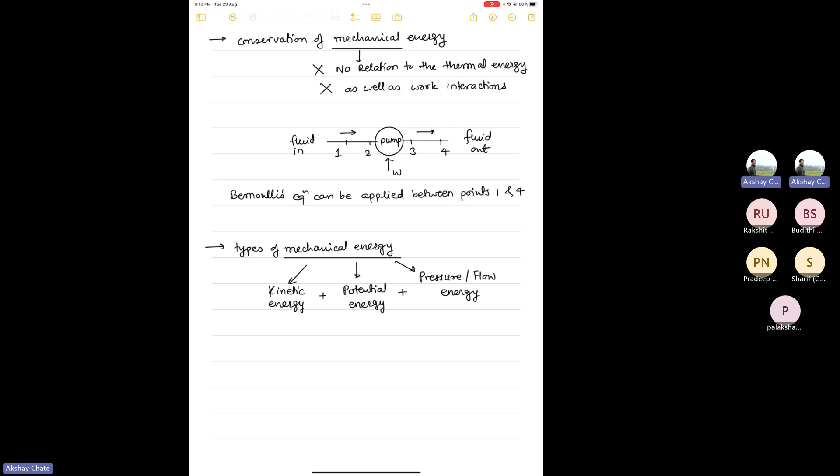Now, if you are interested in the derivation of this equation, basically they take a fluid element along a streamline and do some physics. I can't do it here because first of all I have not prepared it, and it is not part of this course also. But if anybody is interested in why this equation is of this form, there are some lectures by Professor Suman Chakraborty on NPTEL. I think it is one of the courses on fluid mechanics. There you can find it, I think.

Or you can refer to any standard book. Maybe FM White will have it, or IG Currie will have it. So if you are interested, that is completely optional. If you don't, that is also fine. There is no compulsion here. But if anybody is enthusiastic enough or interested enough, maybe you can go there. But we'll come back to the final form that we are interested in.

So basically, I'll write the form that we typically use, but first we'll highlight the assumptions. This is very important because if you attend any technical interview after GATE exam or ESE exam, and if you say fluid mechanics is one of my favorite courses, then rest assured they will ask you questions from the boundary layer or pipe flow or Bernoulli equation. Typically, they don't go into turbulence and other things because they themselves have forgotten by that time.

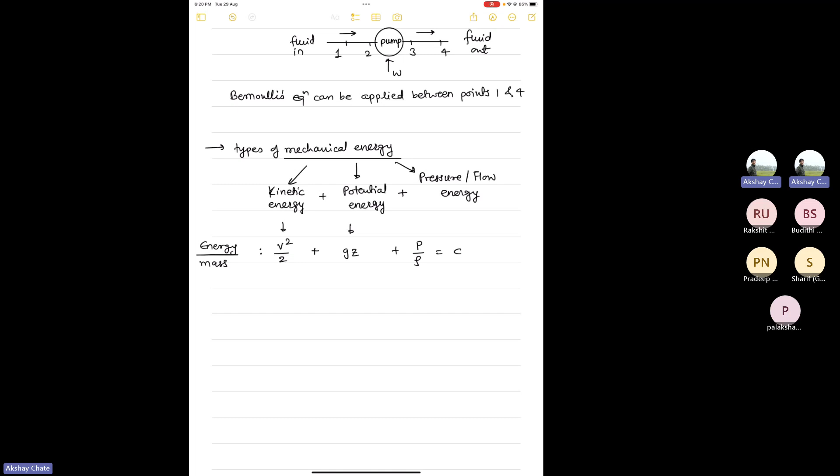And then the pressure energy, if you just match the units, you'll realize that if you want to write it in the form of energy per unit mass, then it takes typically this form. And C is a constant because, as I said, it is a conservation equation. So the sum of these three quantities for a fluid flow between any 2 points should remain constant under some assumptions that we'll discuss.

Somebody can express this equation in the form of head, which is typically done. So that is basically head or energy per unit weight. So basically they divide the whole equation by g, gravity acceleration. So then it becomes v square by 2g plus z plus p by rho g is equal to c.

So then they call this a static pressure head. This is your datum head, and this is your dynamic pressure head. So you can write it in any form, but in the end it's a conservation of energy equation that you should remember. And one important term, static pressure head plus datum head, they are typically called piezometric head. These are all terminologies, you should remember them.

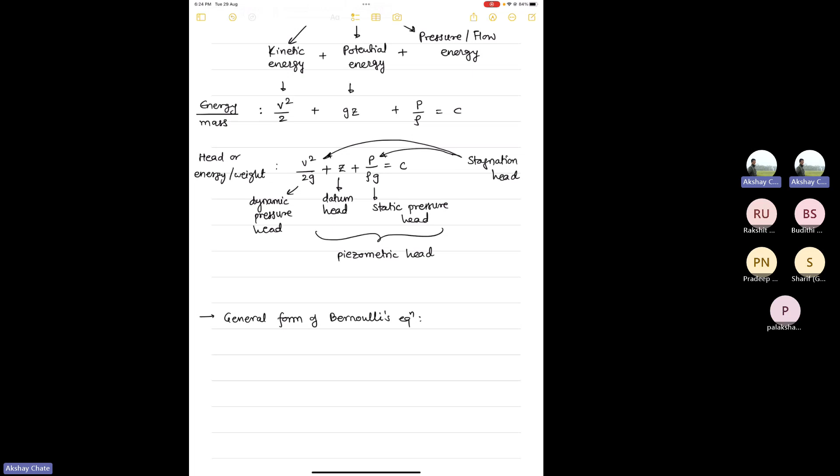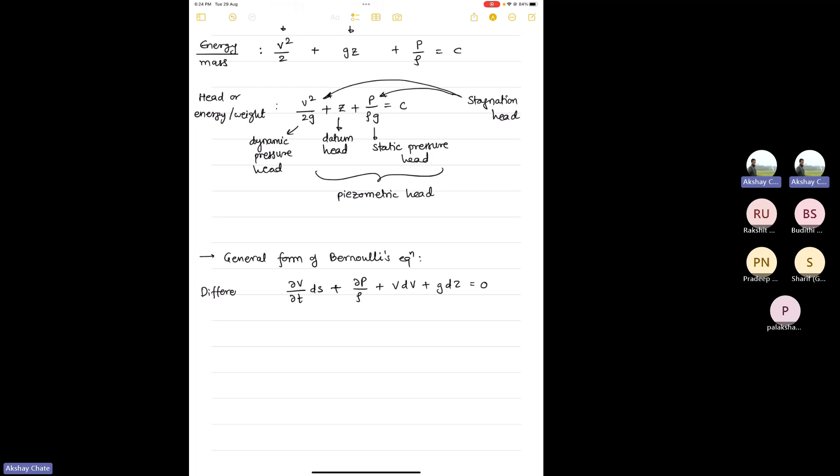So the general form of the Bernoulli equation you might have seen in the class. There will be one unsteady term, then there will be the pressure term, then the velocity term, and then the datum term. This is the differential form of the equation. So I'll just write it: this is the differential form of Bernoulli equation.

For problem solving, this may not be useful, but to understand how you derive the equation, this is the differential equation form. Then they typically integrate it. So the integral form between, let's say, 2 points 1 and 2. This will be integrated from 1 to 2 along the streamline, and there also from 1 to 2 you will integrate the pressure term.

Then velocity and datum are basically properties of the system, so you can directly integrate them. So it will become v2 square minus v1 square by 2 plus g times z2 minus z1 equal to some constant, because if you differentiate a constant, you will get 0. So this is the integral form.

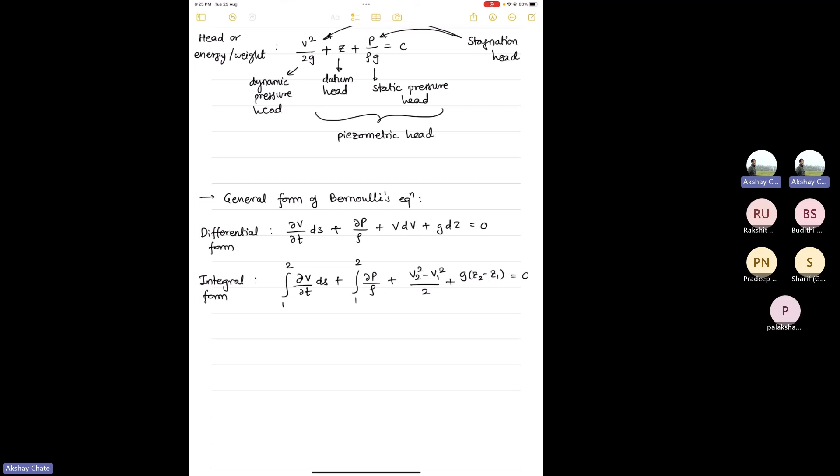And for these forms of equation, we consider the fluid flow to be, first, frictionless or inviscid. So there is basically no viscosity. In reality, there is no fluid which will have 0 viscosity, as we discussed in our initial classes.

But this is some sort of idealization, and in reality they assume no viscosity initially between 2 points. They solve the problem, and after solving they say, okay, we assumed no viscosity, but in reality there will be some viscosity, so we should multiply the final result with some factor that accounts for the viscosity. If you had gone through the flow measurement devices classes, there they solve the whole thing assuming no viscosity, and finally they define a coefficient of discharge parameter, which is the actual flow rate divided by theoretical flow rate.

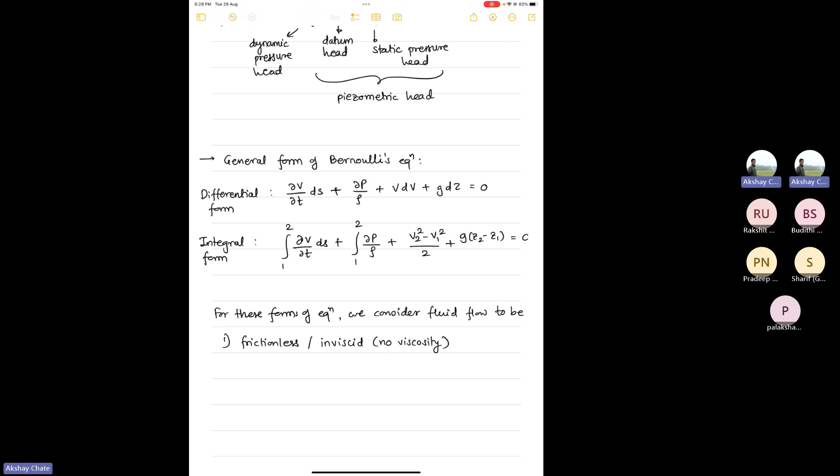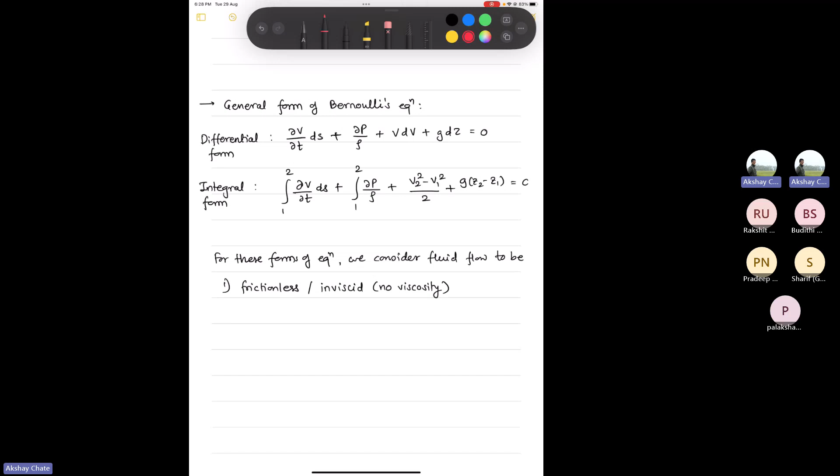And this integration, since we are doing, yeah. So one more. Therefore, yeah, this is very common. Since this assumption is there, therefore, Bernoulli's equation cannot be applied within a boundary layer.

Anybody knows what boundary layer is? We have not covered so far in this class, but it is a part of this course. It will come later. Anybody knows what boundary layer is? So the surface of the stream itself is a boundary layer, and also the sides, they are boundary layers. The sides of the stream of the river.

Yeah. So basically, let's consider one surface over which fluid is flowing. It may be liquid or gas. What happens? The first layer sticks to the surface, then second layer of fluid particles slides over the first layer of the fluid particles. Like that, flow takes place, right? So near to the solid surface boundary, there is a small region where viscous forces, the viscosity of the fluid, is dominant, and that region is called as boundary layer.

We will discuss this in detail in the later classes, but just keep in mind that since there the viscosity effects are highly dominant, we cannot apply Bernoulli's equation there. This is a very common question asked in multiple competitive exams, not subjective exams but objective, like GATE or ESE prelims, CSE prelims, etc. So there you should keep in mind that you cannot apply Bernoulli equation in the boundary layer region.

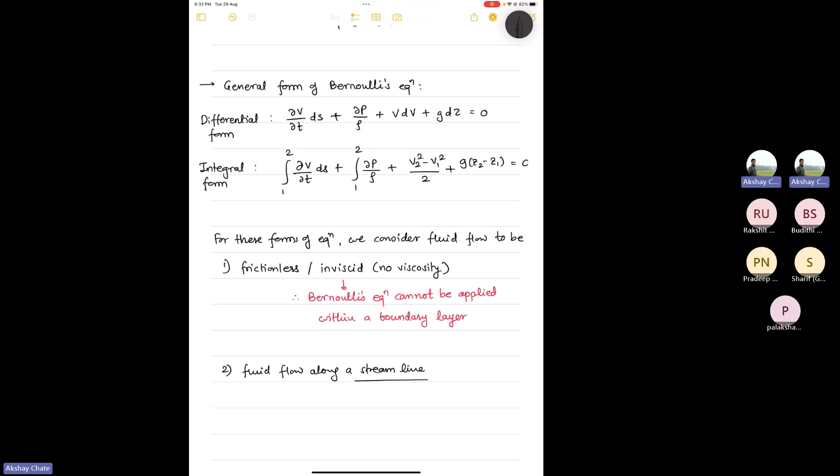So basically, streamline is not a straight line always. It can be a curved line. By definition, streamline is a line where, if you consider a particular point on the streamline, I'll just draw some simple streamline. So if this is a streamline, and if I consider any point on it and draw a tangent to the line through that point, this will give me the direction of the flow at that point for that particular time. If I take some other point and draw a tangent there, I'll get the direction of the flow at that point at that time.

So fluid flow along a streamline. Since we have not covered fluid kinematics, ideally fluid kinematics should be covered before fluid dynamics, because there you would have been introduced to the terms streamline, streak line, path line. Path line is the one which you guys were saying. If you consider one particle in the fluid and trace its path at various instances of time, you will get one line, called the path line, which is the path followed by the particle. But streamline is a different thing.

Streamline is essentially a locus of all the points on a line, and if you consider any point on that line and draw a tangent to the line at that point, you will get the flow direction at that point at that time.

Fluid flow along a streamline is the assumption. Why? Because only then can you do this integral. From differential form, if you want to come to the integral form, you have to do the integration between any 2 points, right? So there you need to assume that these 2 points lie on a streamline. Then only you can do the integration. Otherwise, you can use the differential form without the second assumption also. No, you can't do that because the derivation is of that sort. So forgive me for confusing, but you need this assumption for this derivation.

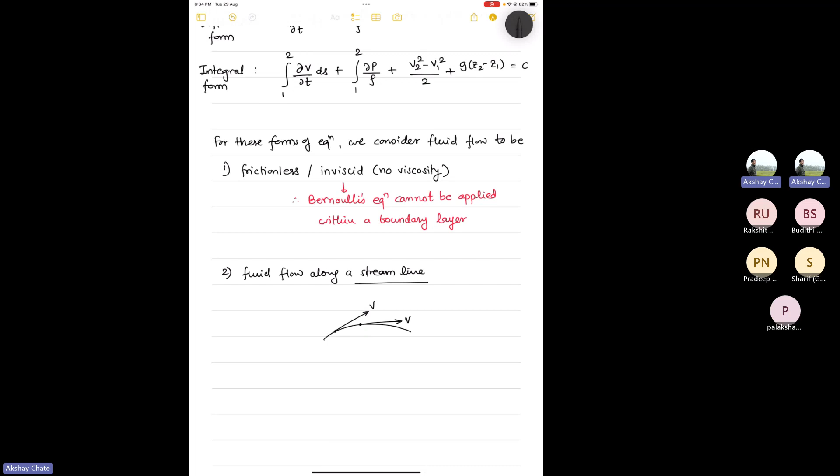So in turbulent flow, anywhere you cannot apply Bernoulli equation. So in laminar flow you can, because laminar flow can be considered as a fluid flow along a streamline or a bunch of streamlines, which they call a stream tube or something, but not on the peripheral region. And in turbulent flow, it is a big no. So because of this assumption, this equation is not applicable for turbulent flows.

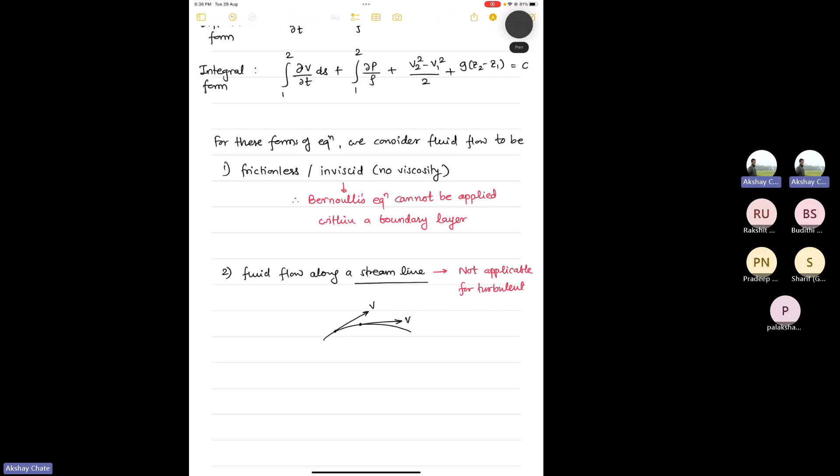And also, since we have not yet introduced the concept of rotational flow and irrotational flow... We have studied about it. Okay, but I have not taught it and I have not seen it covered in the course syllabus so far. I agree that you might have studied it from somewhere else, but anyway. Here I think the sir told us in one of the lectures about rotational, irrotational flow. Yeah, I think there are some problems also here. Okay, then that's good. But essentially, what happens?

This assumption, because of it, there are two cases that arise. So I'll just draw a simple arrow here. So when I say the Bernoulli equation is valid when the fluid flow is along a streamline, or the equation is applied along a streamline, there are two types of flows: rotational flows and irrotational flows.

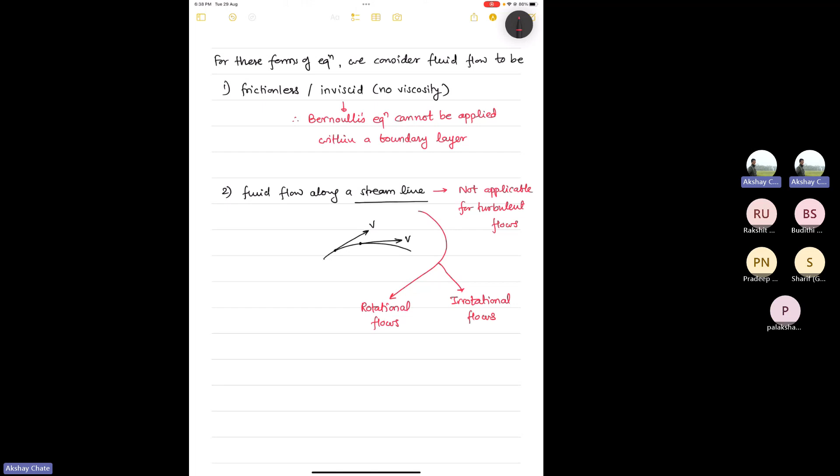So basically, rotational flows means that type of fluid flow in which, if you consider two fluid particles in a fluid flow, there will be some angular velocity or some angular acceleration, some sort of angular interactions between them - that's rotational. But in case of irrotational flow, even if the flow is rotating as a whole, there will be no relative vorticity or relative angular interactions between two fluid particles. So that is irrotational flow.

And in irrotational flows, Bernoulli's equation is applicable across the flow domain, because it is the property of irrotational flow that there will be no vorticity between any streamlines. So instead of taking one streamline, you can take all streamlines, and across them you can apply Bernoulli's equation.

But in case of rotational flows, Bernoulli's equation is only valid along a streamline. So if somebody asks you in any exam or any interview, can I apply Bernoulli's equation for a rotational flow, then your answer should be: yes sir, you can apply it as long as the flow that you are considering is along a streamline. If it is not along a streamline, you cannot apply it in the rotational flow domain. But if it is an irrotational flow case, then you can apply it along any streamline or across any surface also directly. So it's like that.

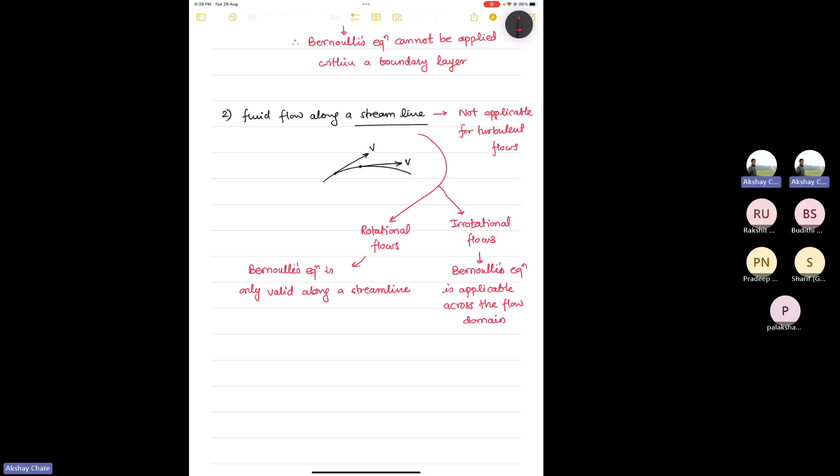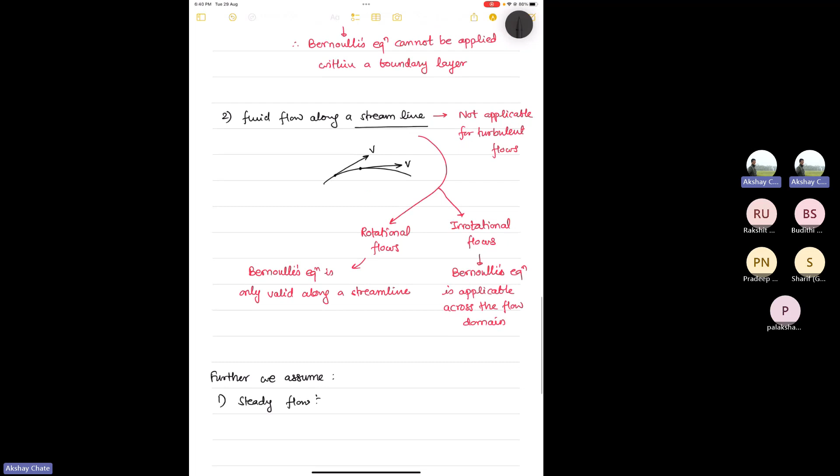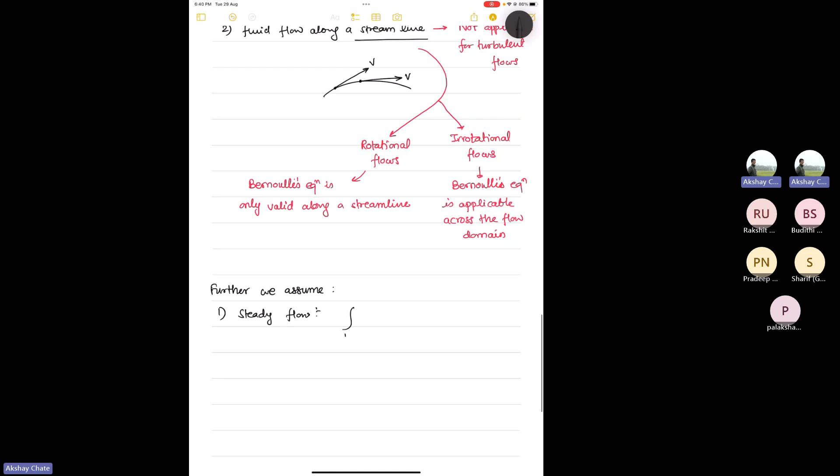So based on these two assumptions, we arrive at the differential and integral forms, and then we further simplify this equation. Then further we assume first steady flow. So as I explained in previous classes, when I say anything is steady, that means the variation with respect to time will not be there. Therefore, the first term goes away. So this term, integral 1 to 2 of del V by del T ds, goes to 0.

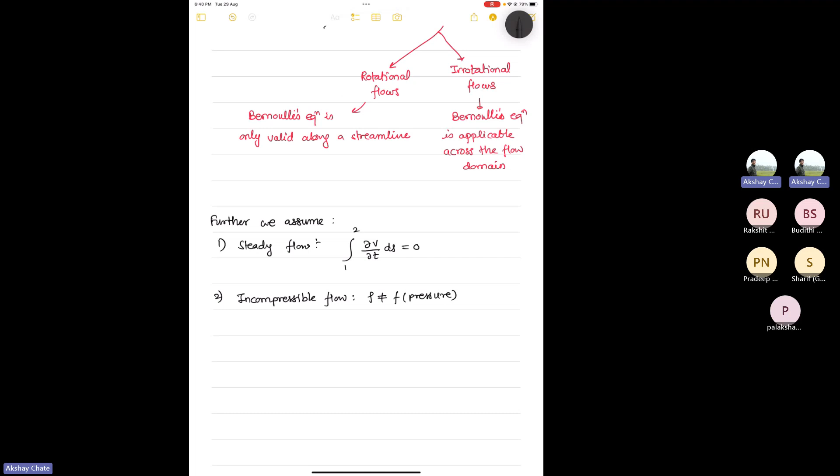Then again we assume incompressible flow. Therefore, your density is not a function of pressure, and therefore this integral where you have del P by rho between 1 to 2, you can take the density out, and it becomes del P from 1 to 2, which is basically P2 minus P1 by rho. So you assume that the flow is incompressible, and basically this assumption says that your density is not a function of pressure. But I can tell you again, here is also one trick question that is typically asked.

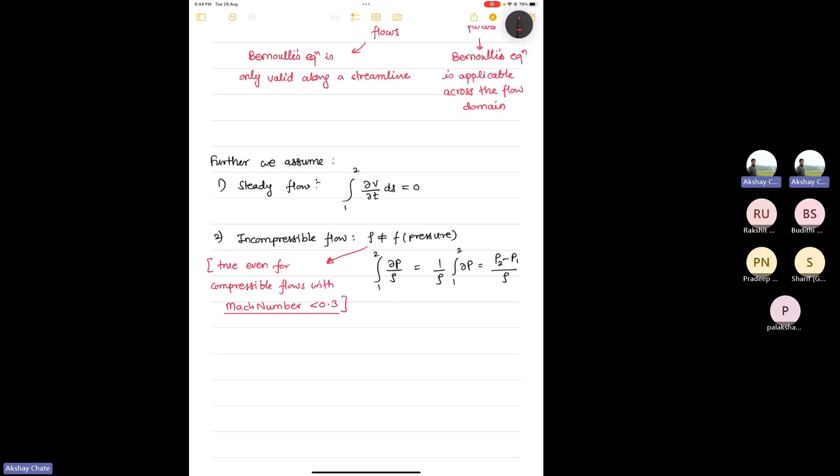One second, I think. Yeah, I have the derivation. I'll just... give me a second. Yeah, so actually we are... the time is going fast.

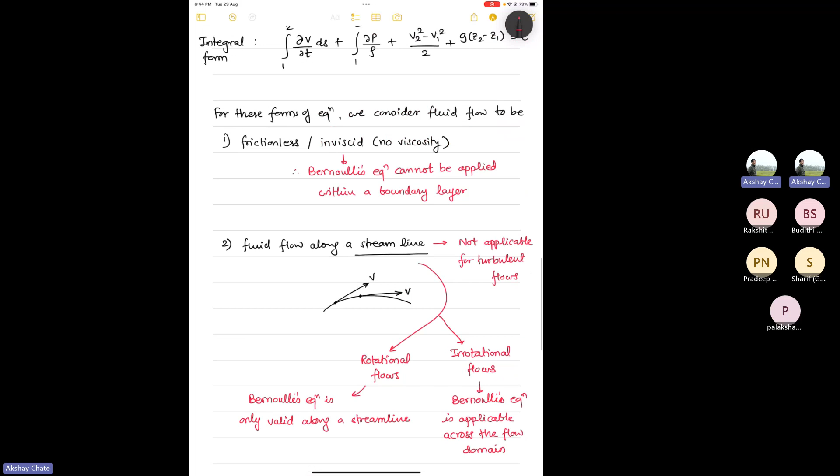Anyway, so basically with these two assumptions and the two assumptions earlier, the final form of the Bernoulli equation that we are going to use is: P2 minus P1 by rho plus V2 square minus V1 square by 2 plus Z2 minus Z1 is constant. So this is the final form that we are going to use.

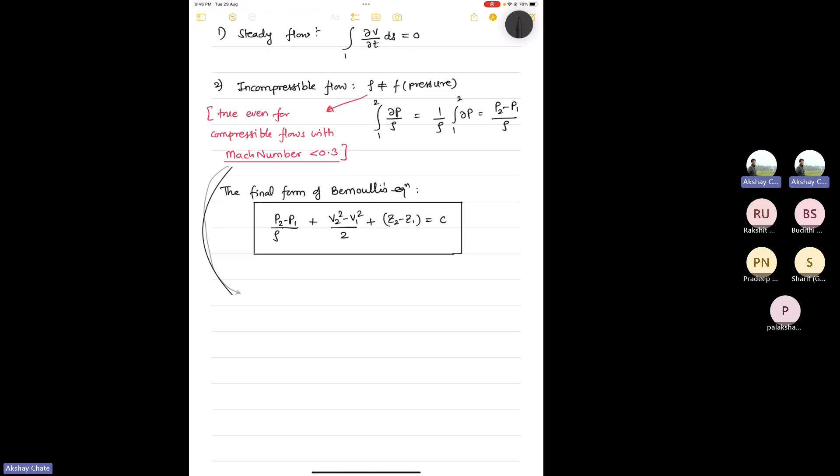So the point was, I could have directly gone to question solving, but I feel this is a tricky part of this course that you should know. Obviously we'll solve some examples, no question there, but if you have some theoretical background behind it, it will be better. Coming back to this, we'll quickly see how this is done and move on to the questions, because we are already at 6:46.

So basically, flow is considered incompressible if the change in density is less than or equal to 5%. In case of liquids like water, this is always true, so water flow at normal temperature and pressure is always considered incompressible. But in case of gases, this is important because density varies with both pressure and temperature. As long as the density variation divided by the total density is less than or equal to 5%, we assume it is an incompressible flow.

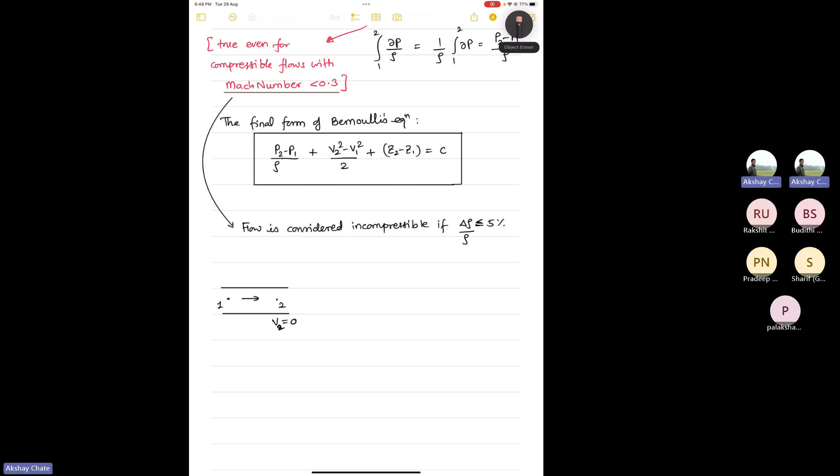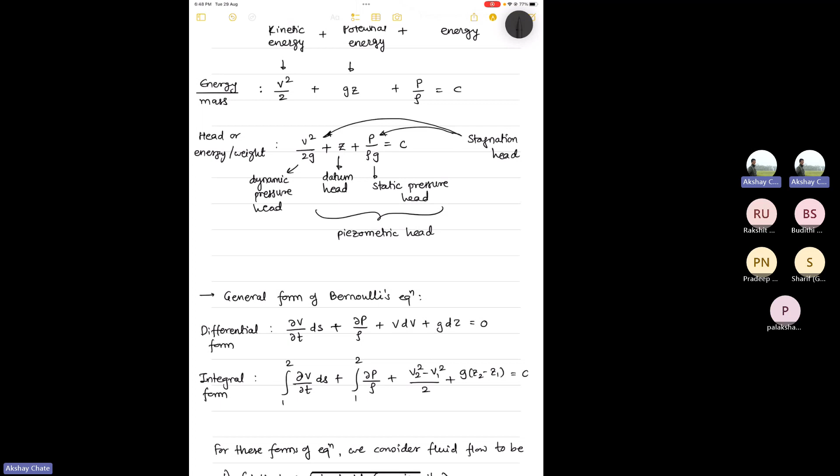So if such flow is taking place, and if you apply the Bernoulli equation here, when the velocity is brought to 0, it is considered as stagnation pressure. So P2 will be equal to stagnation pressure. As I told you earlier, this stagnation head is static head plus velocity head or dynamic head. So when the velocity is 0, whatever pressure you have at that point, the static pressure will be equal to the stagnation pressure. So P2 is nothing but the stagnation pressure at point 2.

And if you apply the Bernoulli equation, it will become P1 by rho1 g plus V1 square by 2g plus Z1 equal to P2 by, let's say there is a density change, rho2 g, plus V2 square by 2g plus Z2. And this is a horizontal flow, so Z1 and Z2 are equal, so that cancels out. V2 we are assuming as 0 at that point, so that goes too. So what we have here is V1 square by 2 is nothing but P2 minus P1, or P2/rho2 minus P1/rho1, like that.

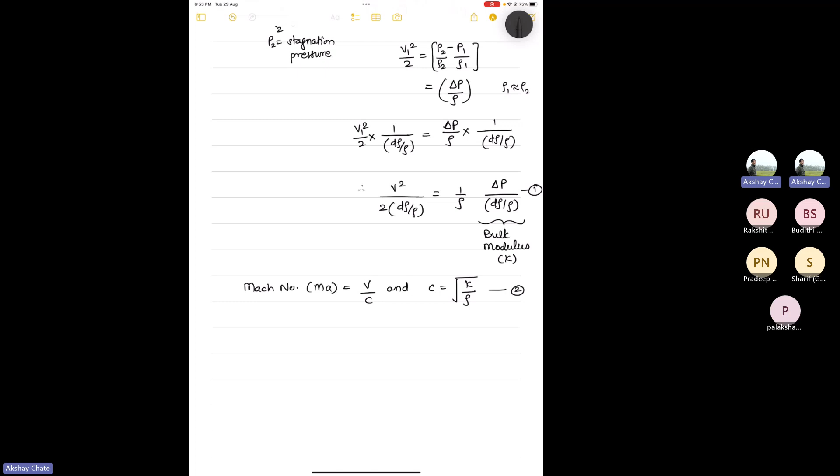So now we have this definition for C from equation number 1. Let's say this is equation 1. We can get V from it. Basically, you square both terms, because in the equation we have V square. So from equation 1, what is V square? It is 2 d rho by rho into K, and one rho will be there, so K divided by rho. And what is C square from equation 2? It is K by rho. So basically this cancels, and what you remain with is 2 into d rho by rho.

So therefore your Mach number is the square root of 2 into d rho by rho. And as I said earlier, if this change of density, percentage change of density, is less than 5%, it is an incompressible flow, or you can assume density is not a function of pressure. Therefore, if you put 2 into 5%, that is 0.05, this becomes square root of 0.1, which is approximately 0.32. And therefore, if Mach number is less than 0.3, we can assume flow to be incompressible.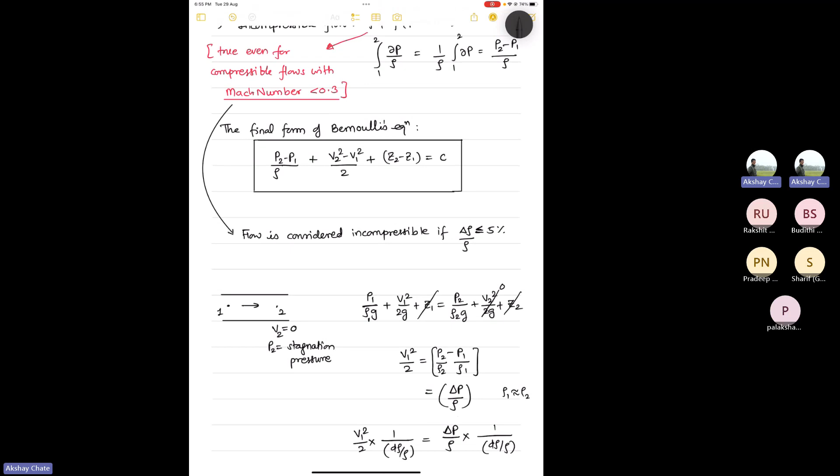Anyway, as far as this class or the problem we are going to solve next are concerned, there should be one G here. Sorry, I missed it. Yeah, because there is G with the Z, right? So there should be a G here.

I have a doubt, sir. Yeah, tell me. You have written, sir, if Mach number is less than 0.3, we can assume the flow to be incompressible. And previously we studied that this holds true even for compressible flows with Mach number less than 0.3. So compressible flow will be... incompressible flow will be at less than 0.3 Mach number.

See, for incompressible flow, there is no concept of Mach number. So you don't consider Mach number for incompressible flows. Mach number comes only for compressible flows. And in compressible flows, if the Mach number is less than 0.3, you can consider it as an incompressible flow and apply the Bernoulli equation along a streamline in that flow.

Okay, sir. Thank you. Okay. So now we'll move on to some problem solving, because

Sir, from this stagnation pressure, the pitot tube concept was there, sir. Pitot tube. Yeah. So basically, stagnation, as the name suggests, what do you understand when I say something is stagnant? The stagnant word itself means something is at rest. So basically, when the fluid is flowing, you put one L-shaped or 90-degree bend tube, you dip it in the fluid, let's say till the center. So what happens? Water enters the tube and it will come to rest, right? Because it cannot flow anymore.

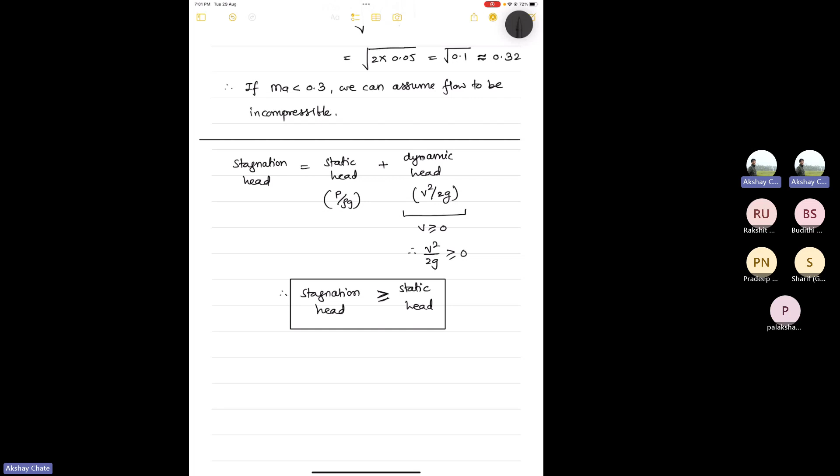But typically, we study flow, right? So there will be some flow of fluid from A to B, and therefore there will be some static head, stagnation head, and this is the relation between them. So this is like a 1 mark question in GATE or ESE prelims. Somewhere you can see this question also. Anyway, so now we'll move on to the problem solving part.

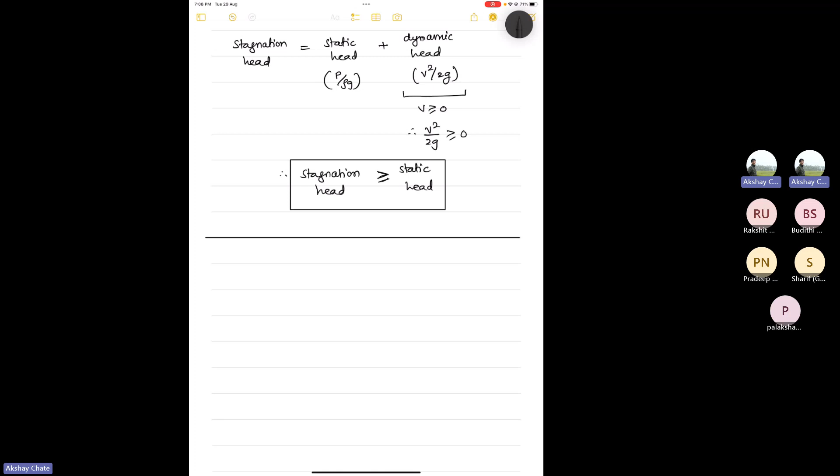Yeah, so see, the pitot tube, as I said, basically looks like this. If there is a fluid flow, let's say a channel flow and you are looking at a cross-sectional area. This is the center line of the pipe. What you do, you put one L-shaped tube here like this, and there will be a small opening here. At this point, if fluid is flowing in this direction, there will be some velocity, right? Because that will be the average velocity of the fluid flow at the center.

If you are considering average fluid velocity, it doesn't matter where you put the pitot tube, because that is the surface area average and it should be constant everywhere. But typically it is shown at the center, because the fluid can be considered as inviscid flow there. Anyway, that's not the point. So the fluid will travel through this tube. Initially it will be empty, and here it will start rising because it is open to the atmosphere. And if the pressure inside the pipe is greater than atmospheric, the liquid level will rise above the pipe height, above the ambient pressure.

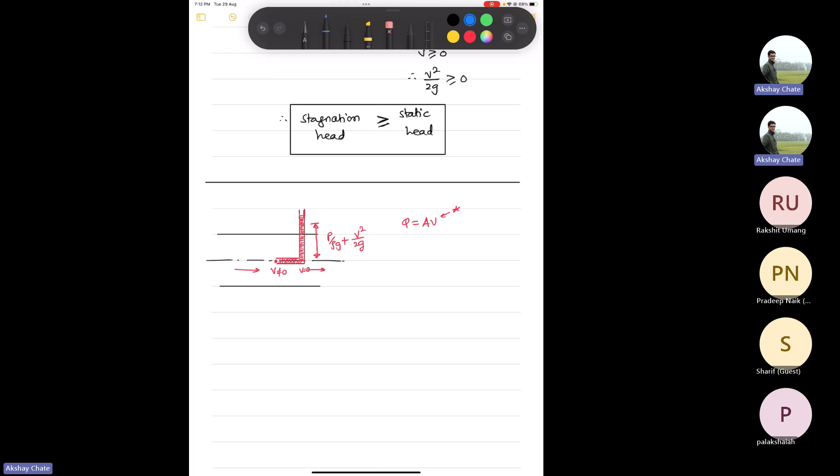Yes, sir, but the concept of V not equal to zero and V equal to zero, that part is a bit difficult. When you say stagnation, the velocity of the fluid is zero, is it correct? Yeah. So at any point in this vertical limb of the pitot tube, there is no horizontal velocity, right? Yes. Because the fluid is brought to rest. It is stopped. All right. Okay, got it. And sir. Yeah, in practice, there will be one annular tube around the central tube. One second.

No, I'll not show this way. It will be confusing. So they put one more tube here, straight tube only. 1 second. So here also, fluid will start coming up, right? And it will rise till the pressure at the top becomes equal to the atmospheric pressure. Typically, this is called a piezometer, piezometric tube. Piezometric tube.

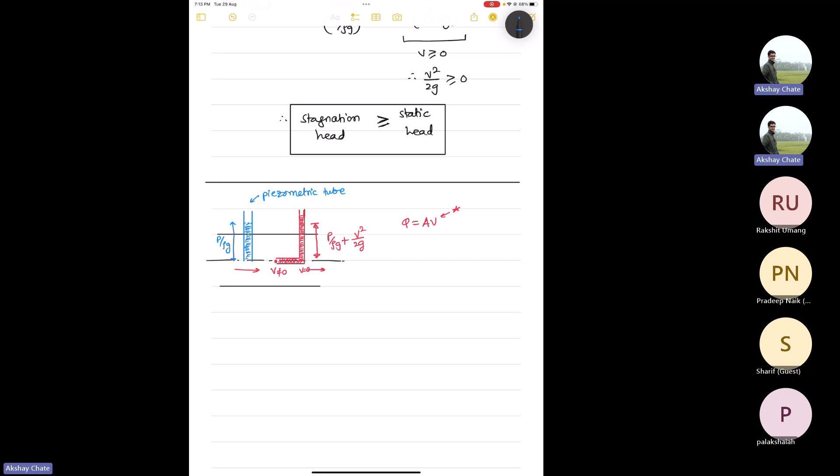And here, the difference that you get is a static head, because it is open to the atmosphere. There is no velocity head coming into the picture here. So here you get P by rho g, and this should be till here. And this is P by rho g plus V square by 2g. So this is pitot tube. Therefore, you put piezometric tube and pitot tube as close to each other as possible. We don't want much variation. And then you take the difference of the two readings.

So if this is reading H1 and this is reading H2, then H1 minus H2 will give you V square by 2g, right? And therefore your velocity, your parameter of interest, you'll get like this, and then you can do Q equal to AV. So this is how they get the velocity and the flow rate using pitot tube and piezometric tube.

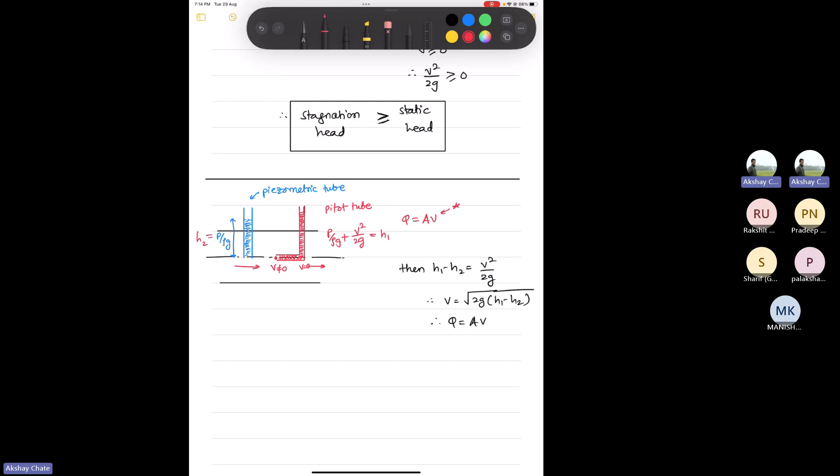But in reality, there are no separate two tubes. They put two annular tubes together. Maybe you can Google it, because carrying two tubes is a problem. So they put both tubes in one component, and that is called a pitot static tube. Working principle is same. There also you will get two separate readings. You take the difference, multiply with 2g and take the square root. That is your velocity of the flow. You can Google it. It's very commonly used. You'll see the picture and you'll understand. So this is the pitot tube and the flow measurement thing.

Then there is one more thing I want to discuss, which is actually very frequently asked. So, there is this venturimeter coefficient of discharge, etc. And one thing is there. Let me just quickly see if I can find it. People get confused there, and rightfully so, because it's slightly important concept here. I'm not able to find it. I can take the question directly.

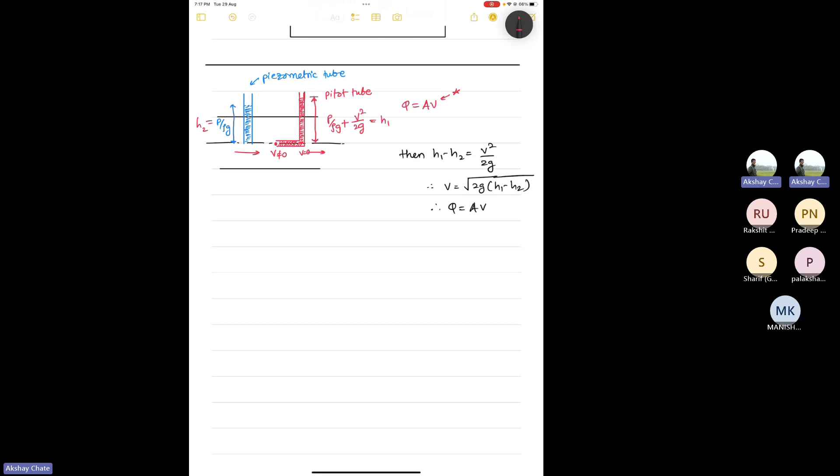So again, this type of question is very commonly asked from this part. There will be a pipe through which a fluid is flowing. Let's say this is the center line, and what they typically do is put this pitot tube like this. Maybe I should have taken the image to draw it. It takes time. Anyway, forgive my drawing, but this is how it should look, and this is your pipe. The flow direction is like this. If this is water, they'll put some mercury here.

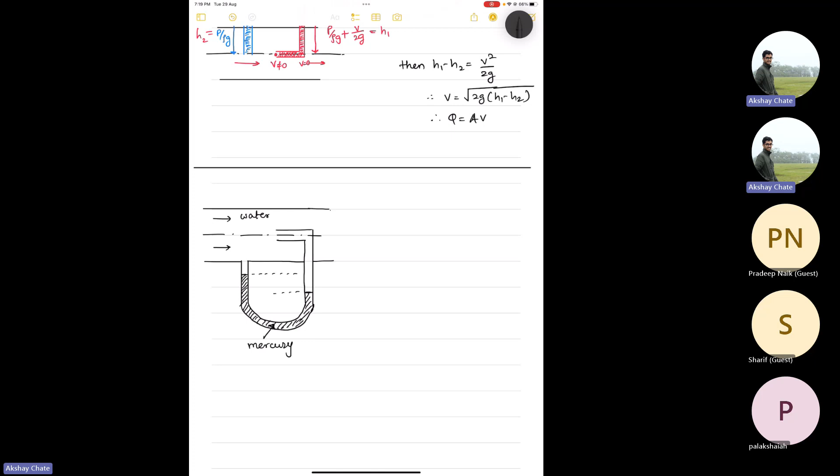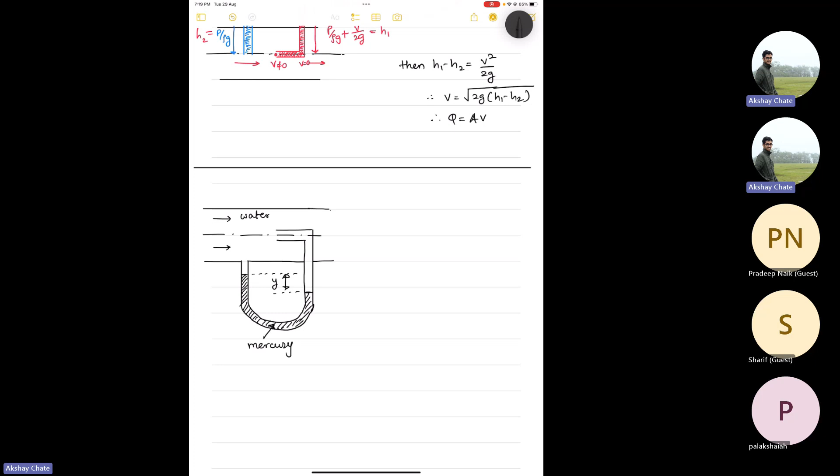There is another variation also. Mercury is a denser fluid than water, so the levels will be like this. And this is the difference between the two readings. Now again, your objective is to find the flow velocity and flow rate through the pipe using this device. So in this case, one second. From this class, let's say this is the datum, just to make our life easy.

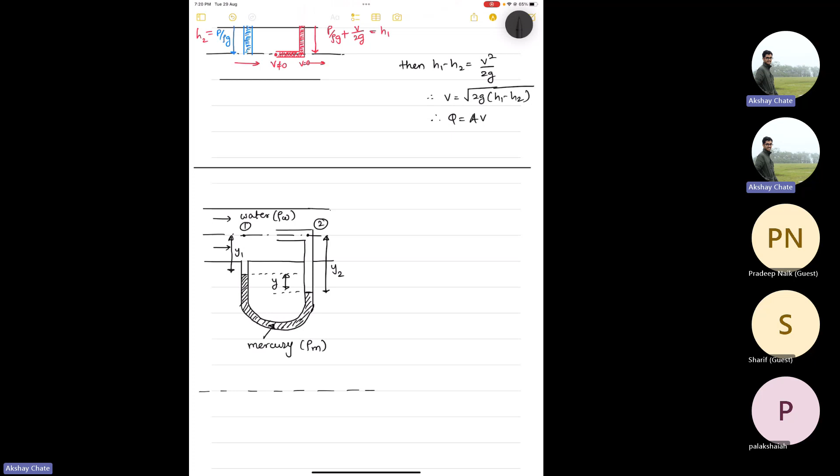And let's say this is point 1, and this is point 2, and the distance between point 2 and the mercury level is y2, this distance is y1. Let's say the density of mercury is rho m, and density of water is rho w. So we assume steady, incompressible, inviscid flow, all the assumptions that are required.

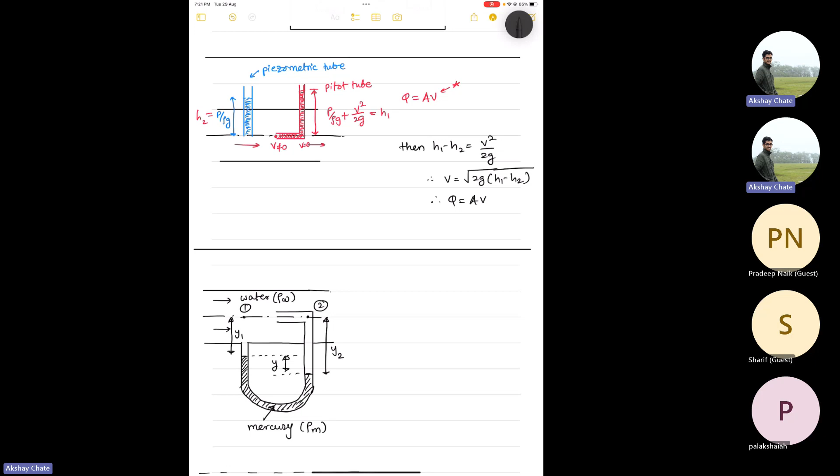But even before applying this, actually, I should explain this in the context of venturimeter only. I am putting it in a normal pipe. Anyway, I have to redraw. No issues. So for this case, there is no need for a datum or anything. This is our fluid statics class revision we can consider. So now, from fluid statics.

Here, see the pressure at this interface is equal, right? Because it is the same liquid and same height. So therefore, you can write P1, which is the pressure at point 1, plus rho water into g into Y1 plus rho of mercury into g into Y is equal to,

yeah, and this complete height is not Y2, it should be here only, because otherwise it doesn't make any sense. One second. Y2, Y1. I should delete this Y2, Y1. It is causing confusion. Anyway,

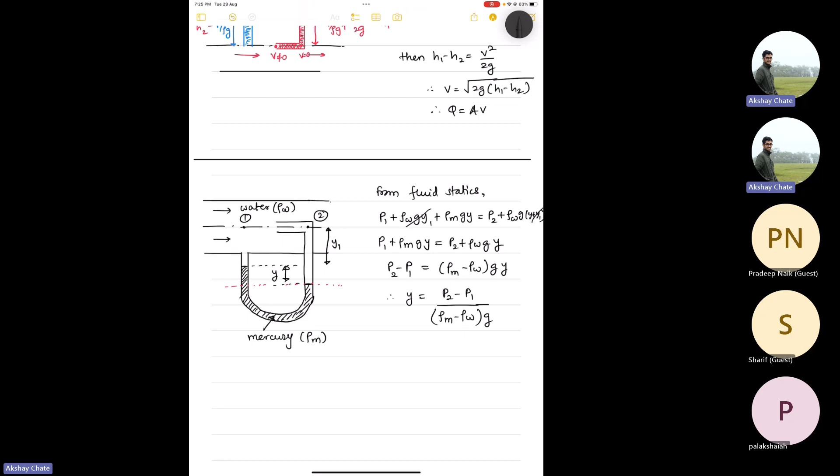Therefore, your y is P2 minus P1 by rho m minus rho w into g. Correct only, no? I think it is correct only. But P1 by rho g. Then, yeah, so leave it at this point like this only.

Then they define something called as a piezometric head between 1 and 2. I told you earlier, piezometric head is nothing but P1 by rho water g plus Z1. This is piezometric head at point 1, and, 1 second.

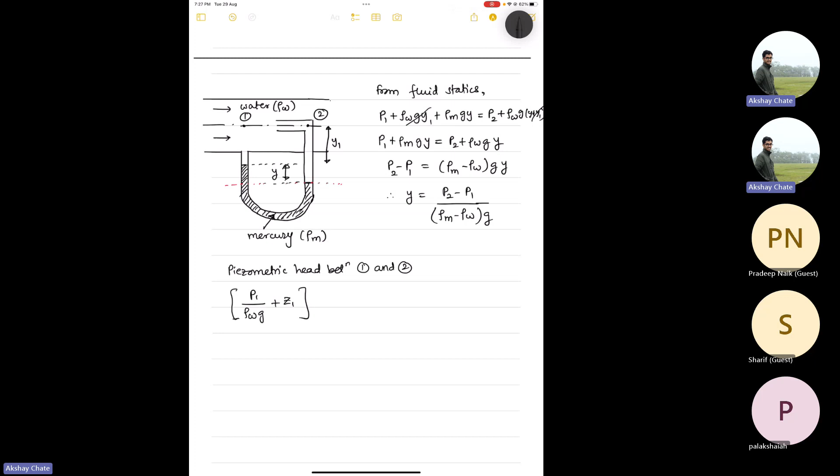Rho m g y, P2, rho g y2. It should not be this way. 1 second. Y2. Okay, let's see where this goes. P2 by rho w g plus Z2, something they call as H2. Here Z1 and Z2 are same, so it should not matter. So basically what we are interested here is P2 minus P1 by

okay, but here we have got y in terms of, let's say this is equation number 1. So we can modify equation number 2 or equation number 1, it doesn't matter. So we can put P2 minus P1 from equation 1. So it should be rho m minus rho w into y into g divided by rho w g. So I have taken P2 minus P1 from equation 1 and put it into the H equation. So g gets cancelled, and therefore what you get is H is equal to

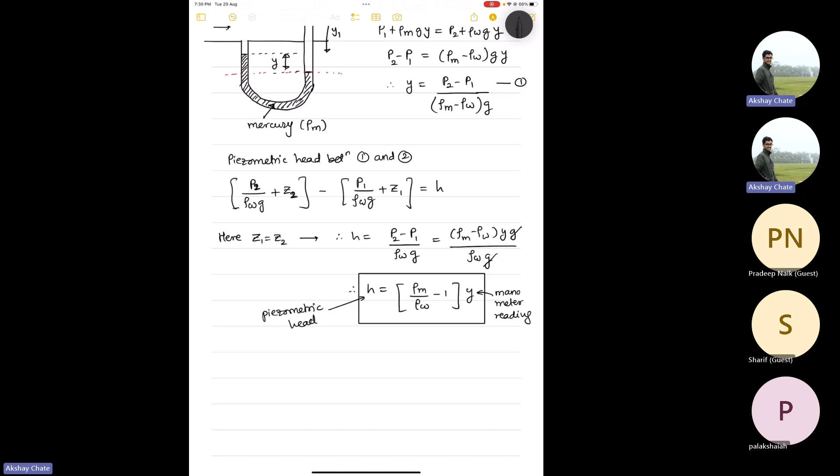Because first of all, let me clarify one thing. Here we have considered a horizontal pipe. Therefore, this Z1 and Z2 did not play any role. But if the pipe is inclined or something like that, then this summation of P by rho g plus Z, the piezometric head, that is the important concept. Therefore, I have written it in this form here, if you would have noticed.

And therefore, one thing that you should note is, instead of this horizontal pipe, if I take, let's say, a pipe inclined at 45 degrees to the horizontal, and if I do this algebra for that pipe also, I will get the same result. So this result is independent of pipe orientation. That was also one of the questions that was previously asked.

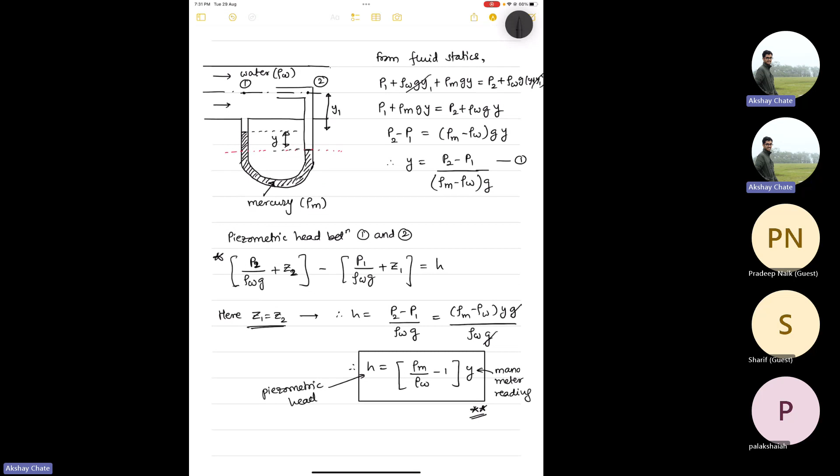And now, independent of orientation of this pipe. So in this question, we are considering the pipe horizontal, right? Completely horizontal in this derivation. But if you consider this pipe at, let's say, 45 degrees to the horizontal, then Z1 and Z2 are not the same in that case, right? There will be some difference there, and that will compensate for the static part of the equation. Maybe you can take it as an exercise.

Consider a pipe at, let's say, 45 degrees to horizontal, and if you do this calculation, what you'll realize is you get the same answer. And you should, because you're considering piezometric head here, and piezometric head is basically the summation of static head plus datum head. If the pipe is horizontal, your datum will be constant, but if it is inclined, your datum head between point 1 and 2, which is Z1 and Z2, will not be the same, but the summation of P2 by rho_w g plus Z2 and the summation of P1 by rho_w g plus Z1 should compensate for the increase in datum.

So basically, what I'm trying to say is, if the pipe is like this, this is your point 1, and this is your Z equal to 0 datum, and this is point 2. So this is 1, this is 2. And this will be your Z2, right? And this one will be your Z1. See, V1 equals V2, okay, because the area is constant. So from the mass continuity equation, V1 is equal to V2.

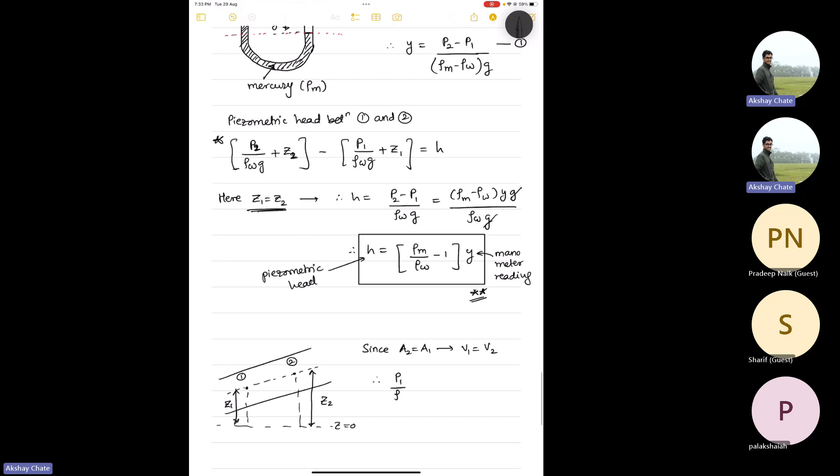Therefore, the Bernoulli equation will be reduced if you assume that the flow is steady, and all the assumptions required for the Bernoulli equation application. I'll just write, since A1 is equal to A2, which is the cross-sectional area, V1 should be equal to V2, right? Velocity should be constant through this pipe. Therefore, if I write the Bernoulli equation, one second. Yeah, so P1 by rho g plus Z1 will become P2 by rho g plus Z2, right?

And since Z2 is greater than Z1, therefore P2 will be less than P1. So your pressure at point 2 will be less than P1. And therefore, when you put some manometer there and check this Y level, you will get the Y formula, equation 1, in a different form. And when you finally do the calculation of H, you should get it in the same form. So basically, when the velocity is the same through the pipe, if your datum increases, your static pressure will decrease at that point. Like that you have to consider.

Anyway, coming back to this one, this is a very important result, H equal to (rho_m over rho_w minus 1) into y. So then based on this, basically you calculate velocity. One second, I am just looking there. So you get H, right? So the manometer reading is different from your piezometric head. So when you have H, now your objective was to find the velocity through the pipe, right? So they just do V equal to root 2gH, but I am just looking, one second.

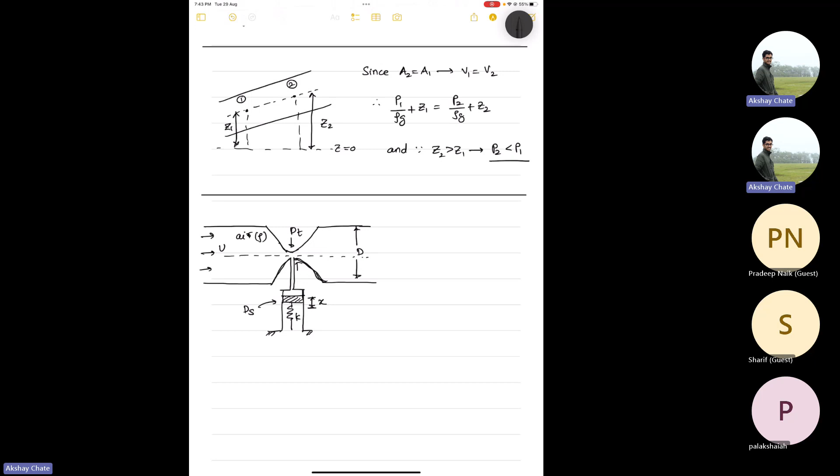So now this is the question, and what they are asking is: air is flowing through the pipe with density rho, and the outlet pressure is atmospheric pressure. It is given in the question as PATM.

Derive an expression for x. This is what they have asked. There were four options, but I am not giving the options because otherwise it will take a lot of time, and that is not the point of this exercise. What you can do is look at the question, you'll get it solved everywhere. But I'm just trying to give you a different kind of flavor to the problems that are asked in this type of area.

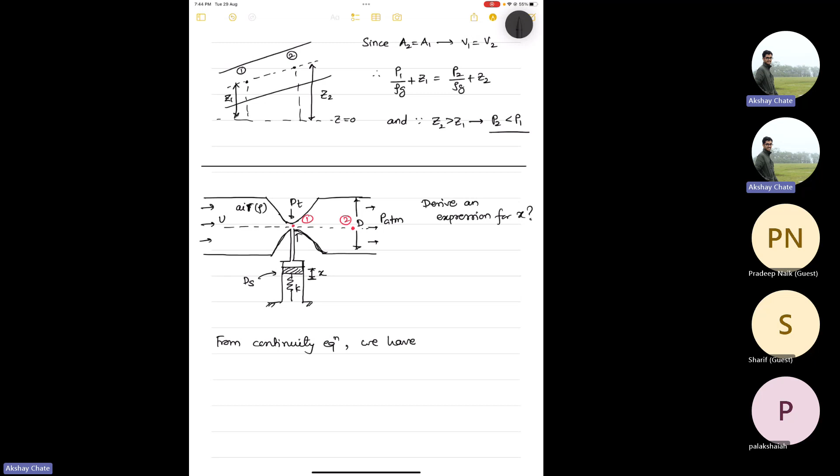Well, let's consider these 2 points, 1 and 2. Now, from the continuity equation, since the same amount of fluid is flowing from point A to point 1 to point 2, mass should be conserved. So your volume and density are the same. It is given that there is no temperature change, so density is assumed to be constant. So the volume flow rate will be same, meaning A1 V1 equals A2 V2.

Now what is A1? A1 is nothing but pi by 4 dt square, into V1, is equal to pi by 4 A2, which is capital D square, into V2. Correct, so this pi by 4 goes. Therefore, dt square V1 is equal to D square V2. So this is the one equation that we have. We can modify it as V1 equals capital D by dt, squared, into V2.

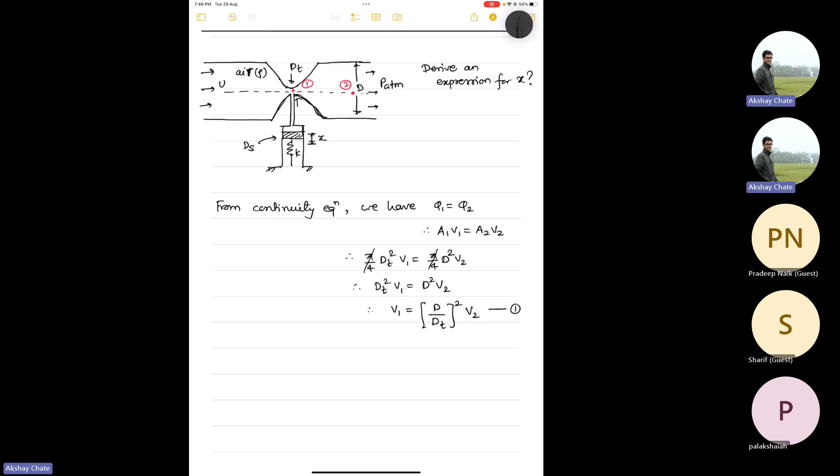Now, here only you should get the idea. Since D is greater than dt, D by dt is greater than 1, and therefore V1 is greater than V2. Which I was saying earlier, that since the area is contracting at point 1 and at point 2 the area is larger, the velocity at point 1 should be more than the velocity at point 2, which is again proved using the continuity equation. Okay, so that is there. Now what next? Then we apply the Bernoulli equation.

No sir, because sir, the pressure is less here, the velocity should be more, is it not? No, it should be the other way. It should be, since the velocity is more at point 1 compared to point 2, yes, pressure should be lesser at point 1 as compared to point 2.

Okay, so it was given in the question that you can apply the Bernoulli equation here, with all the assumptions we discussed initially. So we have P1 by rho g plus V1 square by 2g plus Z1 equal to P2 by rho g plus V2 square by 2g plus Z2. And since it is a horizontal arrangement, Z1 is equal to Z2.

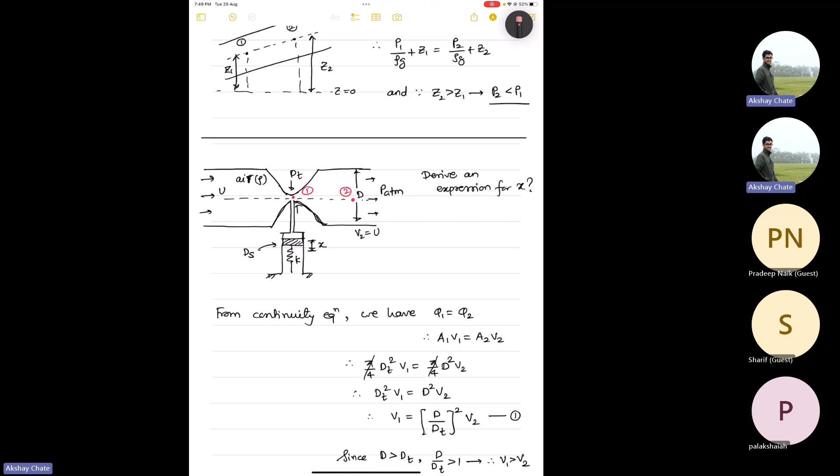So this is your P1 minus P2. Now, what is P1 minus P2? The pressure difference between point 1 and point 2. This pressure difference is causing the deflection in the spring, correct? This was not asked in the question, but I am giving you some physical intuition so you will understand what is happening in this problem.

Since d is greater than dt from the figure, this means d by dt is greater than 1, right? And therefore, if you take the fourth power of this ratio, it should also be greater than 1. And therefore, 1 minus d by dt power 4 should be less than 0. So this term here is less than 0, and therefore P1 minus P2 is less than 0. Therefore P1 is less than P2.

So P1, which is the pressure at point 1, the smallest cross-sectional area, is less compared to pressure at point 2, which is atmospheric pressure. P2 is nothing but the atmospheric pressure. So at P1, the pressure is below atmosphere, that we should remember. And therefore the spring will be elongated.

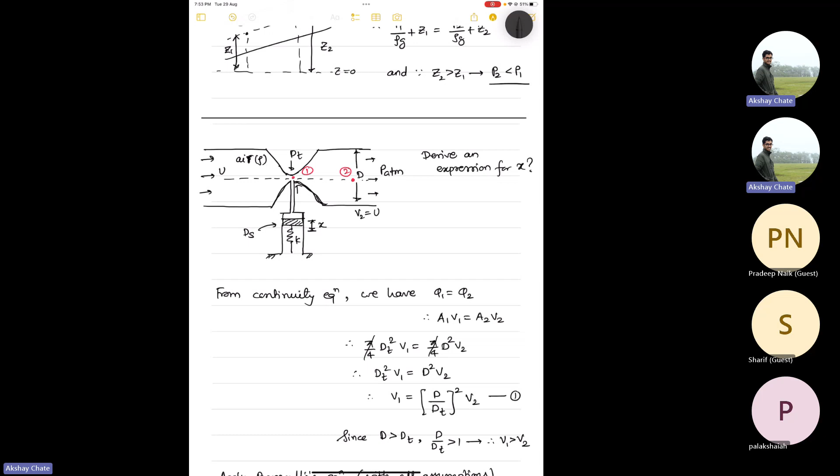So anyway, now the spring force is nothing but minus kx. And what is the pressure force because of the air? It is nothing but pi by 4 into ds square. What is ds? Ds is the diameter of this piston, which is attached to the spring. And what is the pressure difference across this piston? It is P1 minus P2. So now it is just an exercise of putting these expressions in the place, and you will get the answer.

Here also you can see d by dt power 4 is greater than 1, so this bracket itself becomes greater than 0, and therefore x is positive. So again, that proves that the spring gets elongated.

Anyway, this is what it is. This was a slightly different problem than the conventional problems you'll solve from this section. You will be able to solve most of the problems with this derivation.

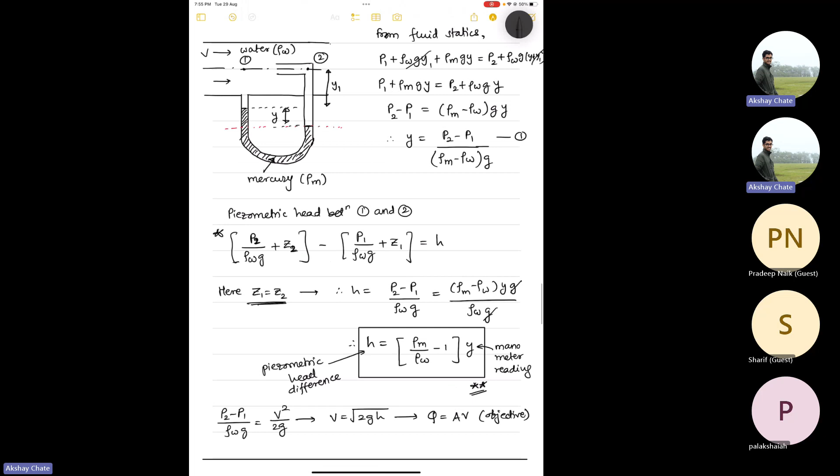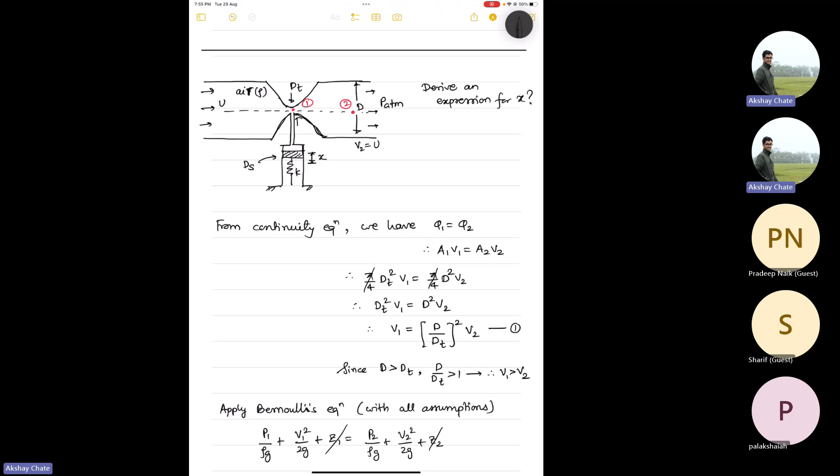Since we are running out of time, in case of this venturi meter and some other orifice meter, nozzles, etc., instead of a spring, you connect a manometer. One end will be at the smallest cross sectional area, the other end at the normal pipe diameter. There you get some manometer reading, which is the y value, and then the piezometric head difference using this formula, then the flow velocity using root 2gh, and q equal to av.

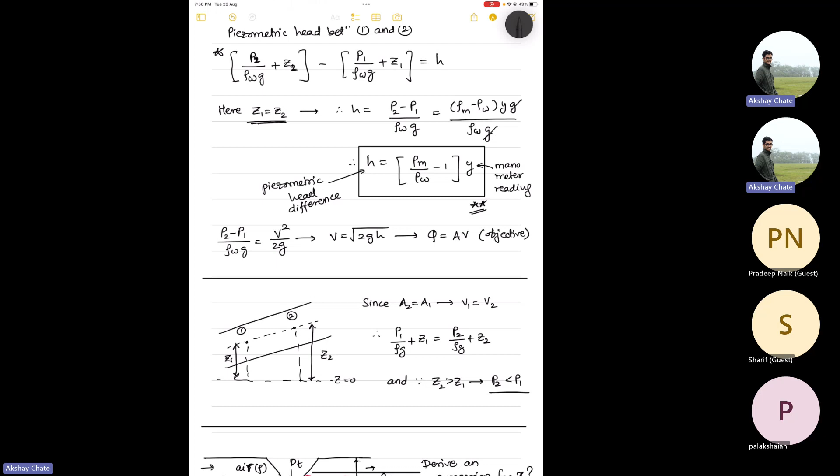But as I said in the beginning of this class, this is under various assumptions, one of them being that the fluid is inviscid, with no viscosity. But if you consider water or air, it will always be viscous.

So therefore, what you do is define something called coefficient of discharge, typically called CD, which is defined as Q actual divided by Q theoretical. Q theoretical is what we got from our earlier calculations, Q equal to AV, A into root 2GH. But in actual, it will be lesser because viscosity is there for any practical fluid. Therefore, CD, no, I should write it this way.

Since practical fluids have viscosity, Q actual will always be lesser than Q theoretical. Therefore, CD will always be less than 1.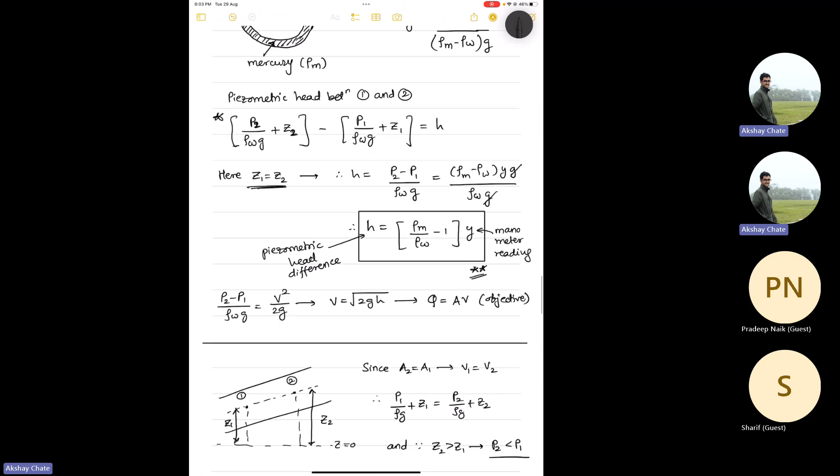It's the H formula. See, I am not convinced that it is a pitot static tube. Because if it is a pitot static tube, the other end should be open to the atmosphere, and it is a submarine. So I don't think you can put a pitot static tube in the submarine. So I am assuming this is a manometer. Otherwise if it's a pitot static tube, the difference will be summation of pressure head plus velocity head, right? And they have not mentioned at what depth this submarine is. If it is near the surface, then it will be atmospheric pressure. So the question is not clear, I would say, Pradeep N. So I am going ahead and assuming the typical problem solving methodology. This may be wrong because the question is not clear.

If you could send me the solution, or if the solution that we get matches with your solution, then maybe the question writing is wrong, or maybe something else is missing. Anyway, we'll solve it. These are the options given, correct? This question is from the assignment, or? Yes, sir. This was the current assignment. Tomorrow is the last date. So I also got confused, so I could not solve it well. See, strictly speaking, I should not help you guys, but anyway, we'll try. I am not convinced whether this question is completely correct. Let's see what answer we get.

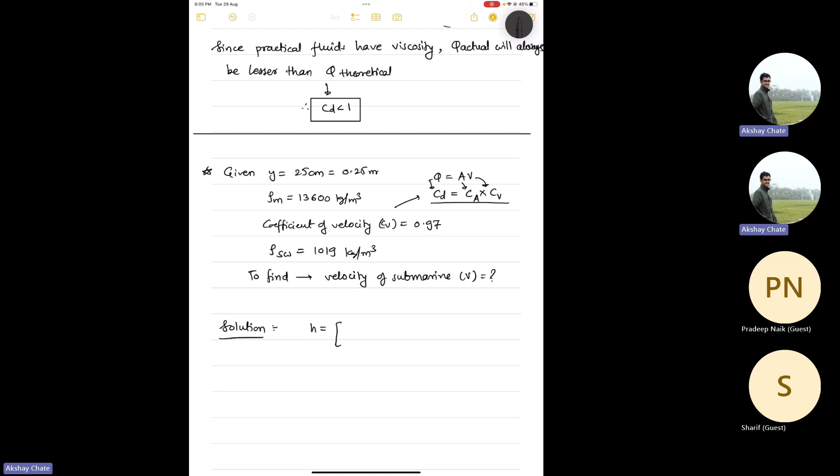If you do, this is the formula, right? So if you do this way, it is 13.6 divided by 1.019 minus 1 into y. Y is 0.25. Can somebody help me with this calculation, or should I do it? Anyway, 13.6 divided by 1.019 minus 1 into 0.25. This comes out to be 3.087 meter. Okay. Then the theoretical velocity will be under root 2gh.

So 3.087 into 2 into 9.81 and square root of this. So this value comes out to be 7.782 meter per second, and actual velocity will be coefficient of velocity into theoretical velocity. So coefficient of velocity is 97%, or 0.97 into 7.782. So if you do that, it is 7.55 meter per second. Yes, sir, it is there. Sorry, I wrote 6.82, so I think 7.7 is correct.

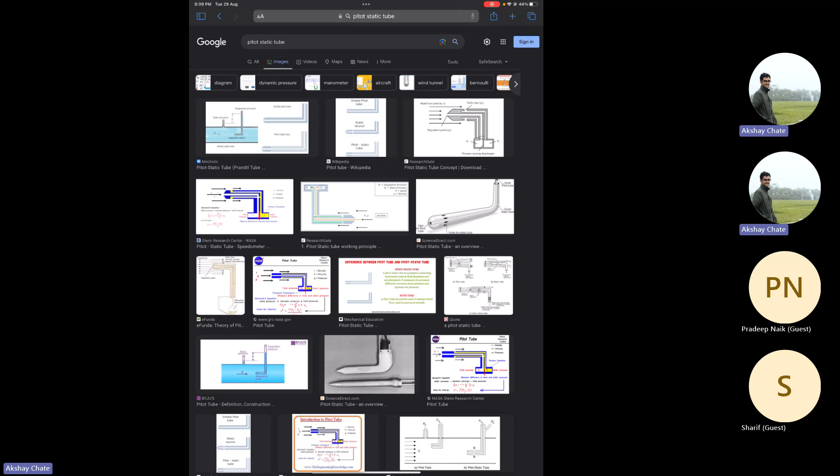Images. So I was just looking for your email ID, sir. Then I found that you're a topper of the Pune school in the system. I got your name, I just searched your name, and oh. Yeah, yeah, it was long back. I think it was the 10th result, so it just flashed at the beginning itself. Yeah. One second, where did I see this image?

Yeah, see, as you can see, this pitot thing is still used in aeroplanes or fighter jets, because this is like a fail-safe mechanism. Even if your digital system goes offline for some reason, this pitot tube is a mechanical component, right? It won't go off. It will be there. Anyway, there is one image I am not able to find. One second.

Acha. Oh, we are already at 10:10. Give me 1 minute. Static pitot tube. It should be showing something now. Yeah. So see this image here. I hope you are able to see my screen.

So yes, I think this is the arrangement that they are talking about in the submarine, because it is not clear in the question. Maybe they should have given an image. But I think this is what they mean. There is a submarine going with some velocity. The nose of the pitot tube is outside the submarine, in the sea, facing the sea. And this is the arrangement. There is nothing open to the atmosphere, and this is similar to what we did, right?

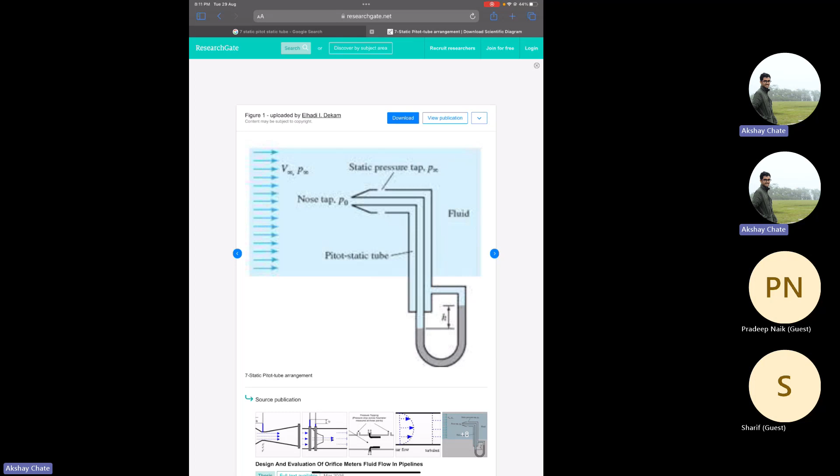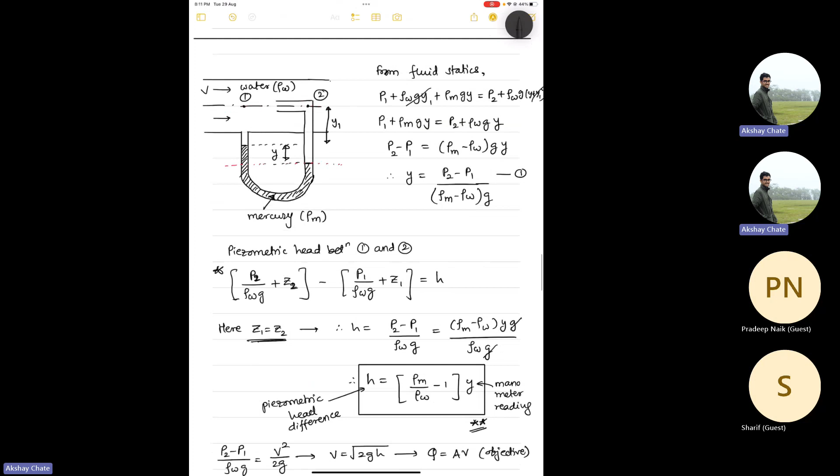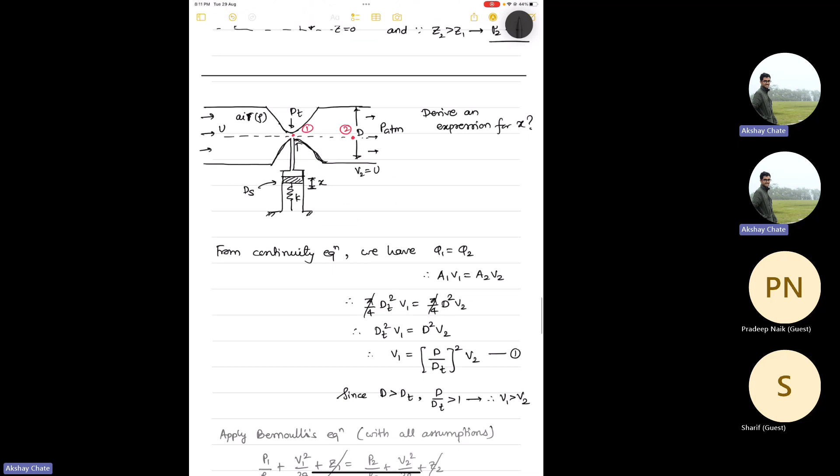So this is the y value that we derived one expression for, right? Here, where is it? This h expression, I told you this is a very important expression. 90% of the problems in this domain will be solved if you know this derivation. I just did the h calculation, then calculated velocity as root 2gh, and they have given a coefficient of velocity of 0.97. So you multiply by 0.97 and you get the answer. Like that, there will be other questions also.

I am happy Pradeep has put this question, but I don't know whether I'm supposed to solve the assignment questions before submission. Thank you, sir. You just saved 2 marks, sir. No, no. See, I am happy to do it, but the NPTEL team says that you can't. Anyway, at least you are attending the class, so you may get some advantage. That's fine. And Pradeep has put some other question also. One second.

At the diverging section of the Venturi meter, the pressure and the velocity. You already explained this, sir. Yeah. So I explained this question, right? I think the question is answered here only. Yes, sir.